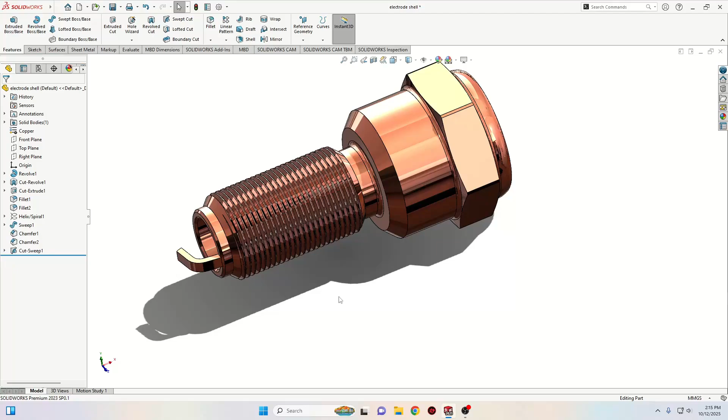My name is Alex and today we'll start to make the components for a spark plug. And this one will be the first one, the shell.

First we'll have to open a new part. And here let's make this plane white. And we'll open a sketch in the front plane. And here we'll start with line to make the next sketch. So we'll make it just like this.

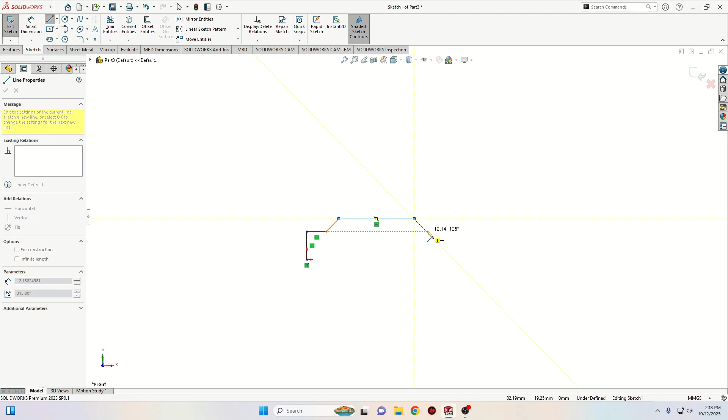And now back to this point. Alright, and now let's make a center line. Make it like this. And now with smart dimension, let's define this sketch. First, we'll start with this. Actually, when we give this dimension, select this line and this center line, and we can put the diameter. Here will be 8 millimeters.

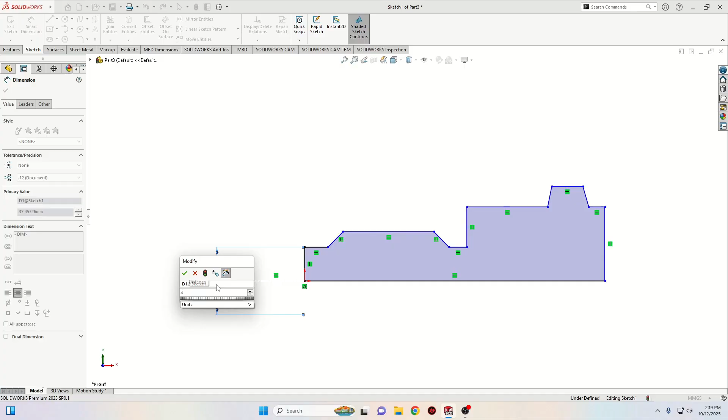And now select this line with this one and select here make collinear. And now this one will have the diameter 10. Okay, this one will have 15. These two should be collinear. And now this one here will have 18.

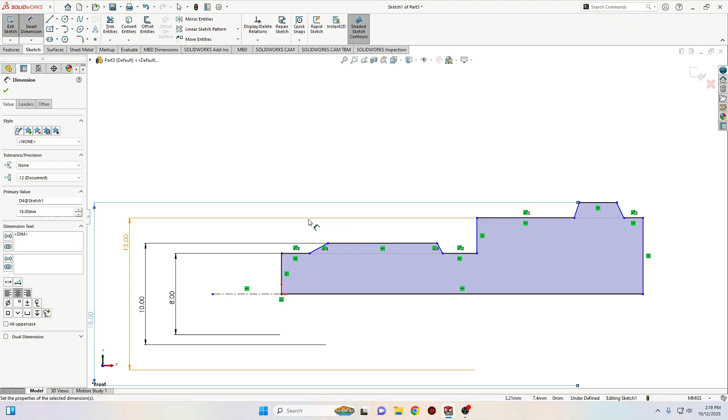Okay, and now this angle from this line to this one, there will be 135 degrees. This line here will have 1.25. And now here, let's see if it's the good angle. It should be 45. In my case, here is this relation between this line with this one, which is perpendicular. And this angle is automatically set. And this is good. If you don't have this relation here, you can put here 45 degrees.

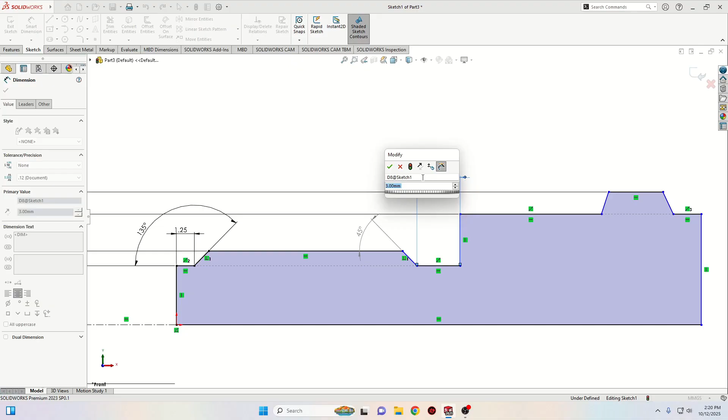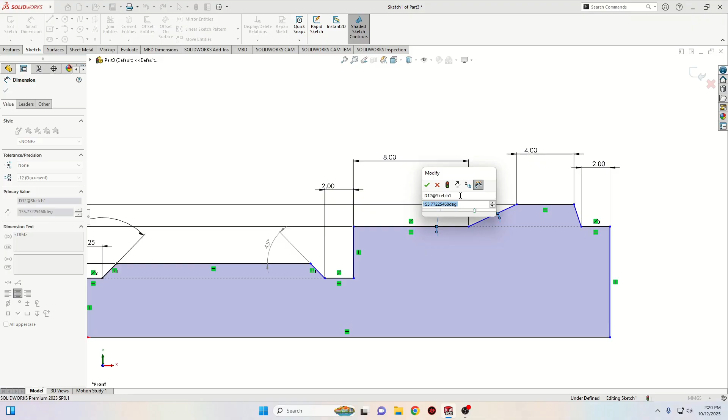And now here will be 2 millimeters. Okay, and this line here will have 8. And this one here will have 4. This one will have 2. This angle here will be 105 degrees. And this one will be the same.

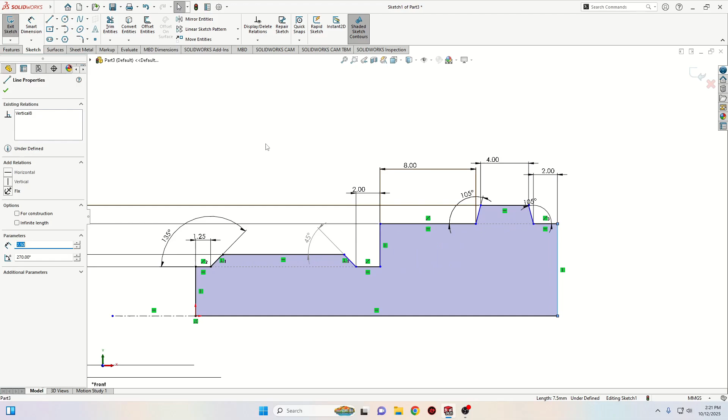Okay, and yes, the last dimension will be right here, and this one will have 14.5 millimeters. And now this is fully defined. Now go to features, use revolved boss base command, and here axis of revolution will be selected this center line, and here keep these settings. Press here OK.

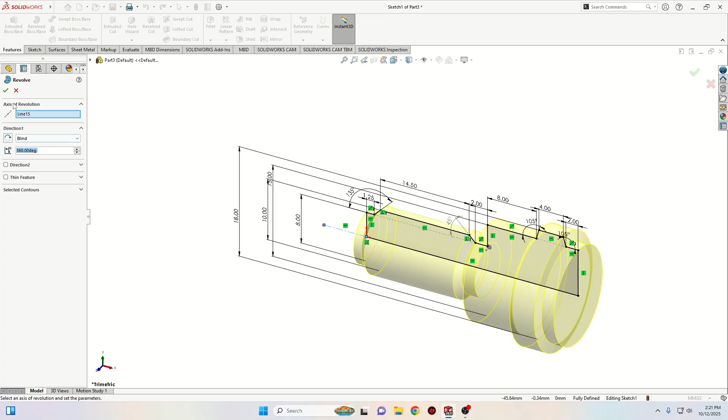Now select front plane, open a sketch, and here let's make the next sketch. Select line, we'll start from this edge, we'll go just like this, and then like this, and until this edge. Then we go to this middle point, and then we go back to this point and back to this point. Alright, and now let's use smart dimension to define this sketch.

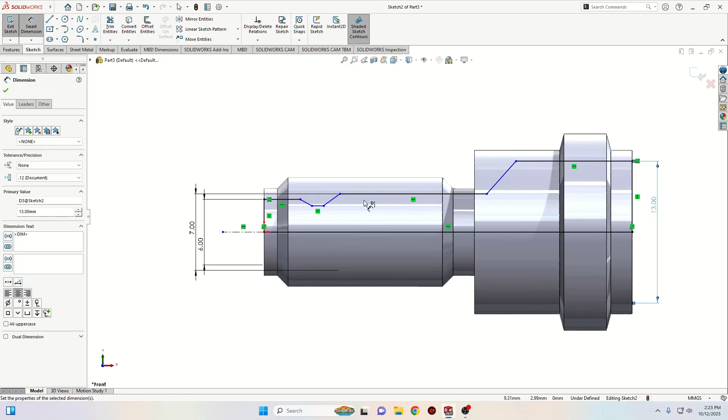First, actually, let's make again a center line. And between this line and this center line, here will be the diameter 6 millimeters. This one will be 7. Alright, this one will be 13. And this one here will be 5.

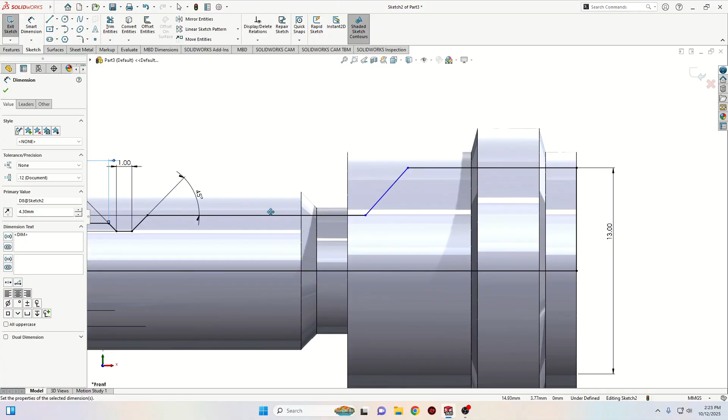And now let's give some angles from this line to this one. It will be 45 degrees. This one will have the same 45. And this line here will have 1 millimeter. This one will have 4.3. Okay, and now let's give an angle between these two. And here will be 135 degrees. And this line here will have 3 millimeters.

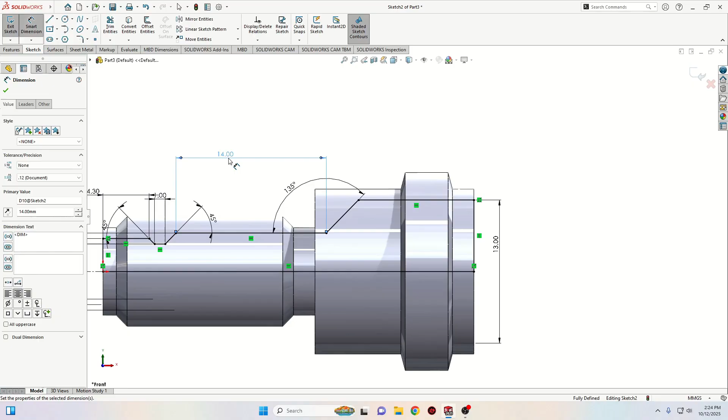It's already over defined. Let's see. Okay, so we'll have to define this one. We can delete this one, and we can put here 14 millimeters. Now this is fully defined. Go to features, use revolved cut, and here will be the same. Press OK.

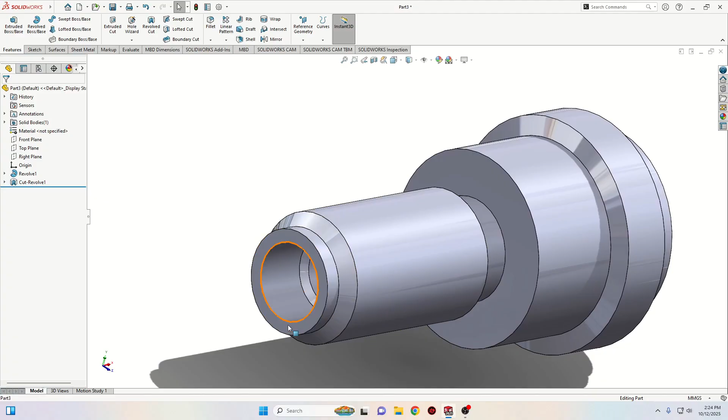Nice. And now let's select this face. Let's open a sketch. And here let's start with the center line, and we'll make a center line like this. And now select center rectangle and make here a rectangle. Now smart dimension, let's give some dimensions here. Here will be 1.25 and here will be 0.75.

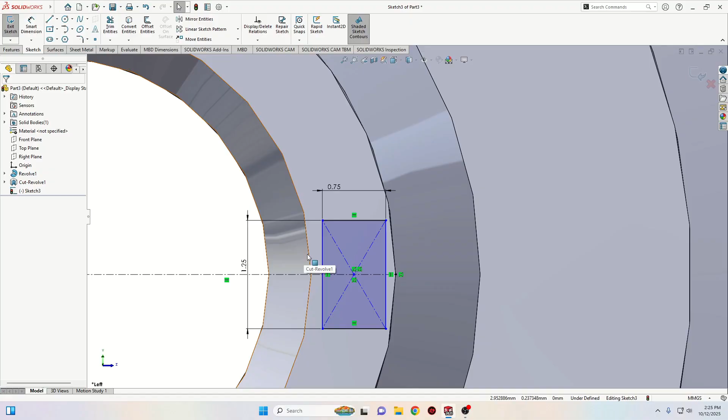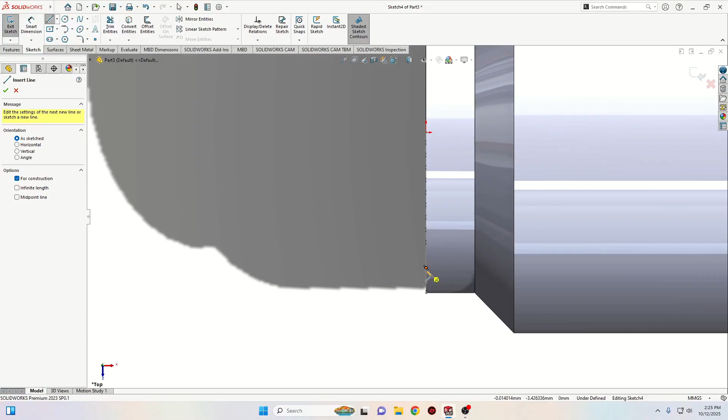And now select this edge with this line and select here make tangent. Now we'll have to exit this sketch. And now let's select the top plane and open a new sketch. And here we'll start with line. Actually, first let's make a center line. This center line should start from the center of this rectangle. Make it horizontal.

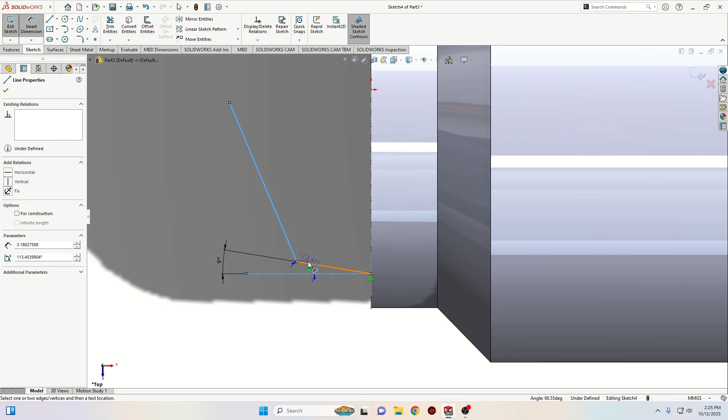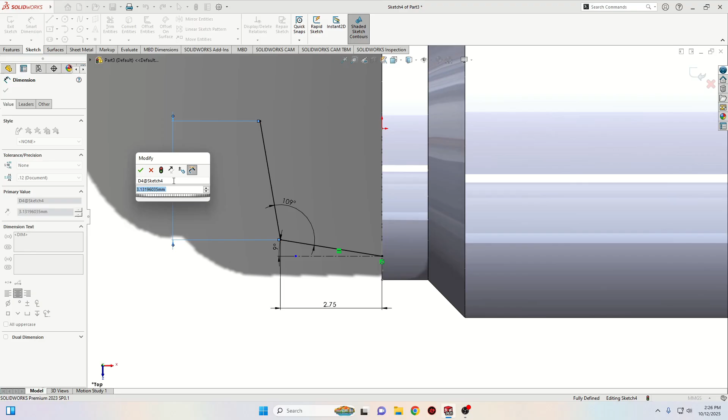And then select line, and make these two lines. And now with smart dimension, let's define them. This angle here will be 9. This one here will be 109. This line here will have 2.75, and this one here will have 3.25.

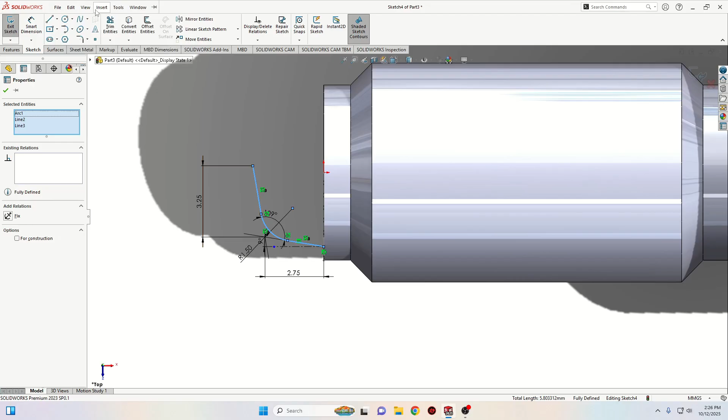And now select sketch fillet. Here the radius will be 1.5, and we'll have to select this point and press OK. Nice, and now let's select these three lines with Control pressed. Then we'll go to this arrow, go to Tools, go to Spline Tools and select Fit Spline and press OK.

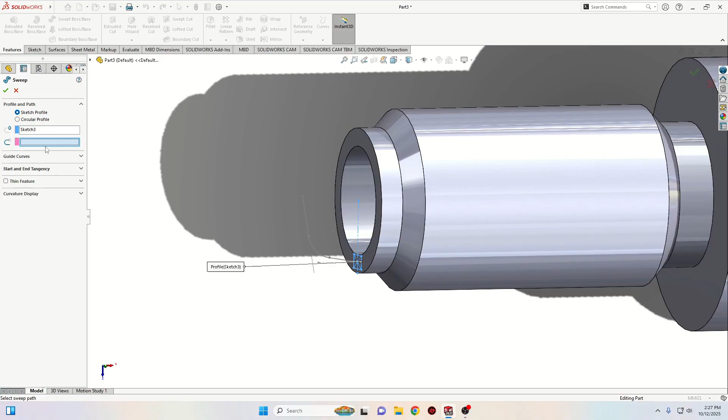And now we'll exit this sketch and go to Swept Boss Base. Here we'll have to select the profile, which will be this rectangle, and then the path, which will be this spline, and press OK. Alright.

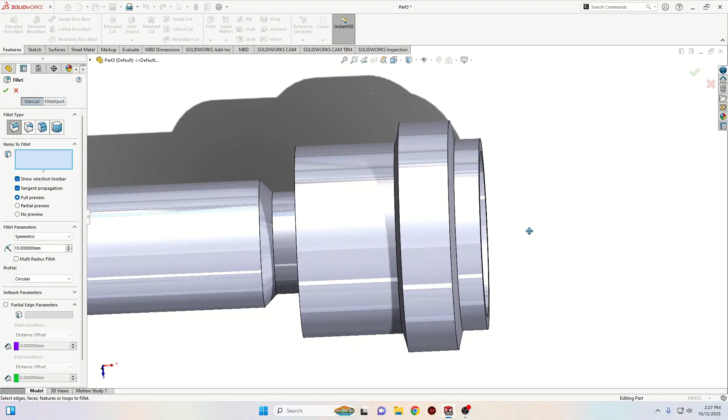Now what we'll have to do is make a fillet here. So go to fillet. This fillet will be a little bit strange; it will not be symmetric. So we'll go to fillet parameters, and instead of symmetric select asymmetric. The first radius will be 2 millimeters, and the next one will be 0.75. We'll keep the other settings as they are, and select this edge. If you cannot see the preview, click here to reverse the direction and it should appear. Press OK.

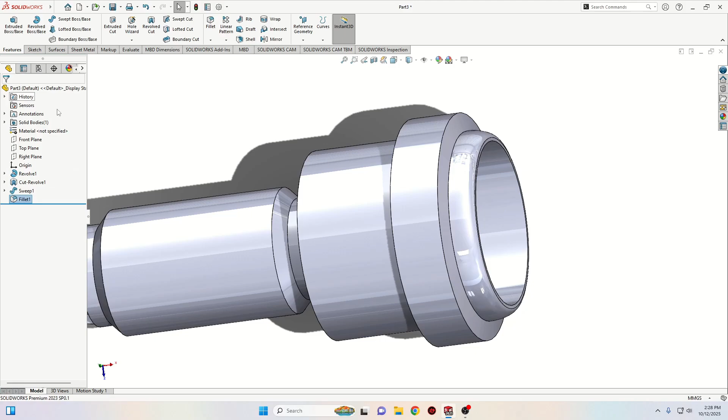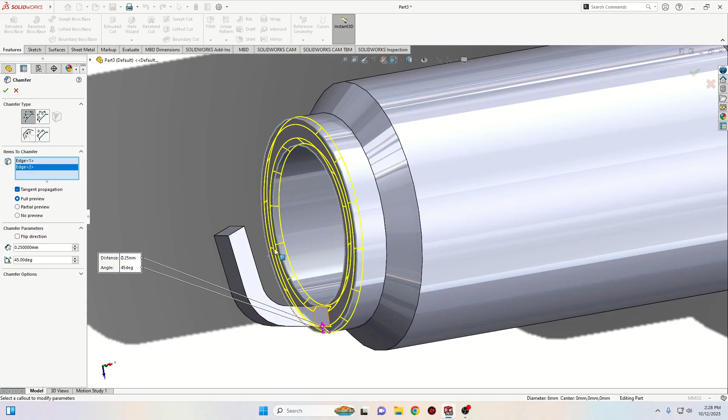Nice, and now let's make another fillet. This one will be symmetric with radius 0.5, and we'll select these edges, this one, and this one. Press OK. Now let's make a chamfer. This one will have the dimension 0.25, the angle 45 degrees, and we'll select these 2 edges. Press OK, and now let's make another one. This one will have the distance 1.5 and the same angle, and we'll select this edge. Press OK.

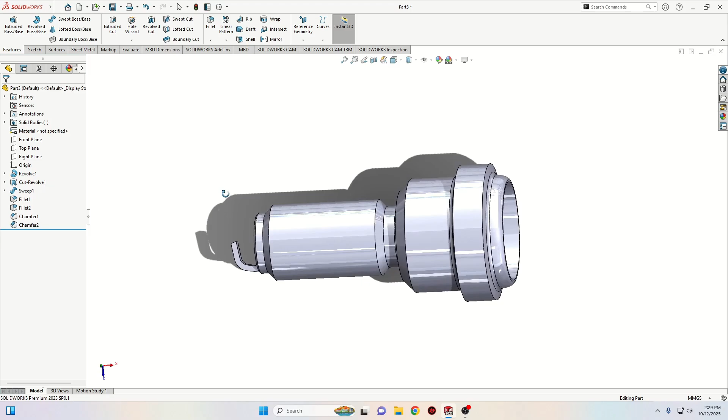Nice, and now we'll have to make a fillet here. To do this, we'll open a sketch on this face, select this edge, then go up here and select the Convert Entities command. Now go to Features, then Curves, and select Helix and Spiral.

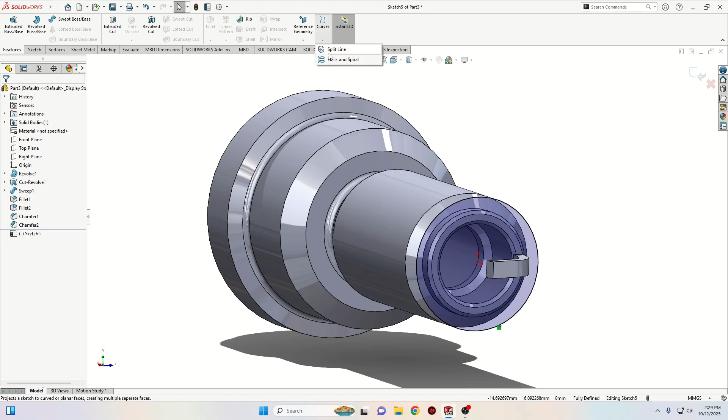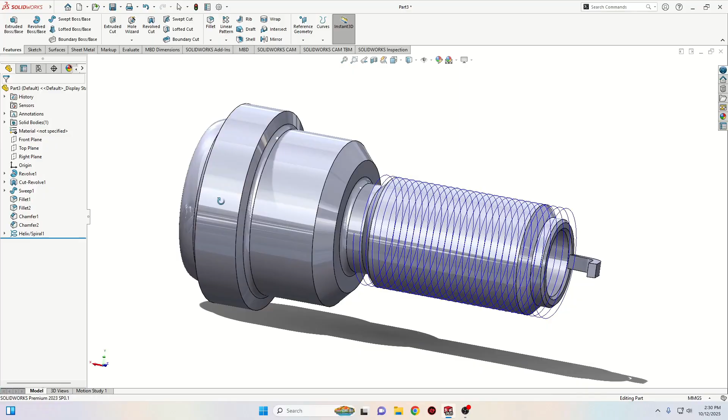Here you should put these settings: height and revolution, constant pitch. The height will be 18.25. You should reverse the direction if it's going the other way. Revolutions will be 29, start angle 180 degrees, and clockwise. Press OK. Now we have our spiral.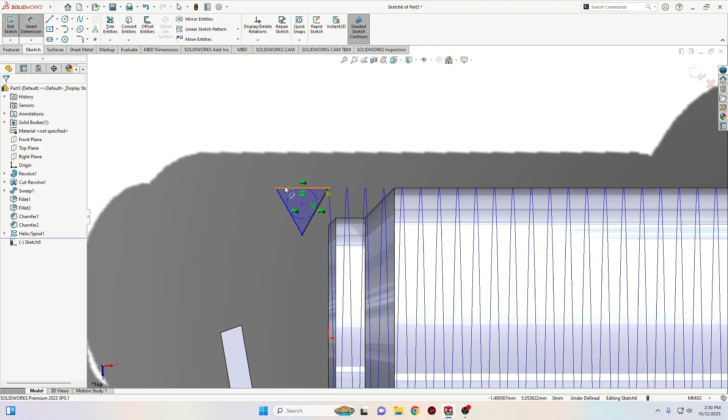Now we'll select top plane and open a sketch. Here we'll select polygon and make 3 sides, so let's make a triangle. Select this line, make horizontal. Now select this point with this spline, make pierce. And now let's give a dimension of 0.5.

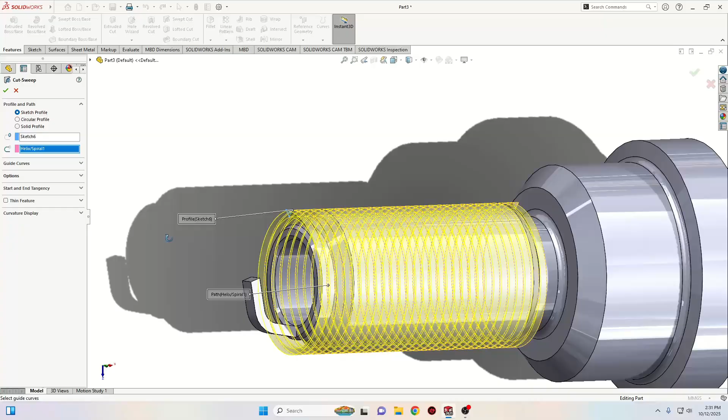Now exit this sketch and select swept cut. If this triangle is not selected, select it. Then select the path, which will be this spline. We can see the preview. We'll keep this one and press OK. Now right click and let's hide this spline. This is looking good. Now this is almost finished.

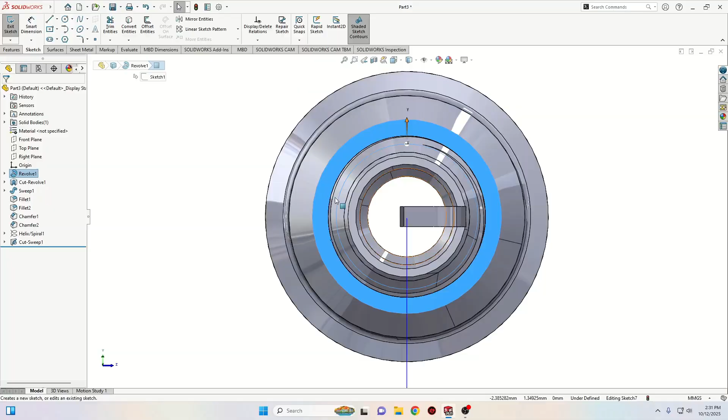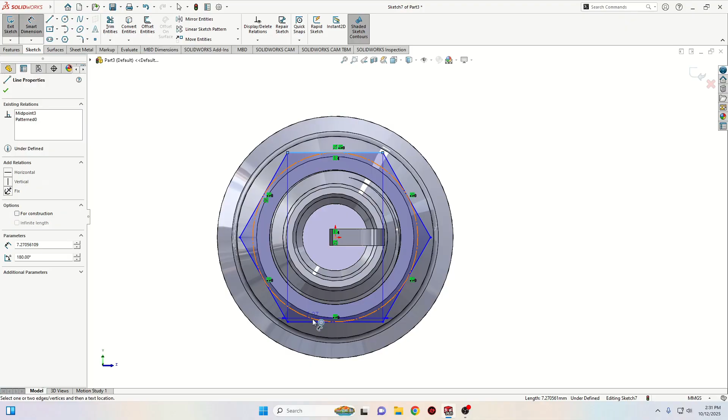Let's open another sketch on this face. Here we'll select polygon again. This time it will have 6 sides. We'll start from this point and make it just like this. Select this point with this one and make vertical. And now with smart dimension, let's give a dimension from this side to this one. It will be 15.75.

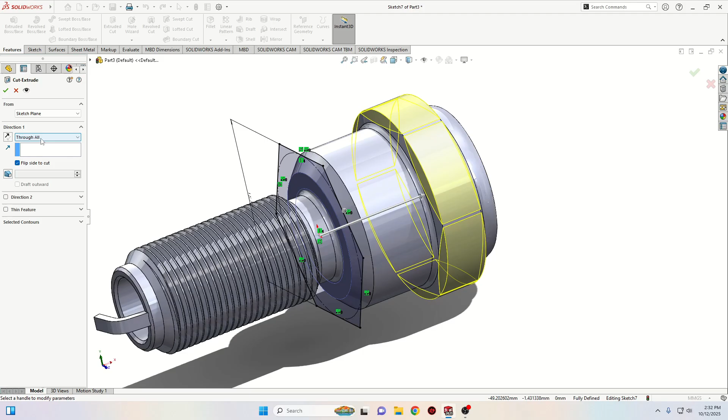And I'll go to features and use extruded cut. Select flip side to cut, and select through all. Press OK. And now this is good. This should be the shell of our spark plug.